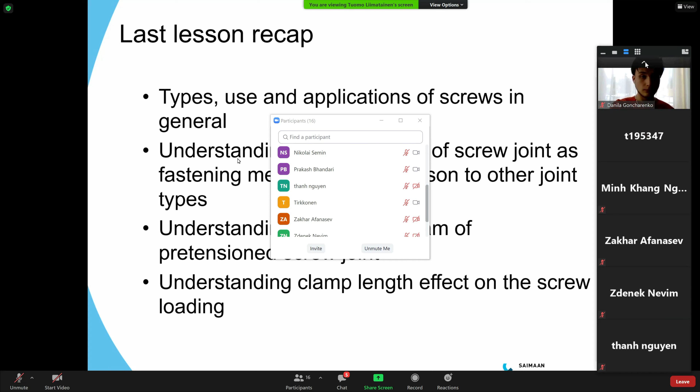So last time we had a presentation about screw joints and their applications, screws in general. We spoke about fastening components, understanding the pros and cons of a screw joint as a fastening method compared to other joint types. We had a discussion about the balance diagram of the pretensioned screw joint, and we discussed how important the clamp length is on the screw loading and in the reliability of a screw joint that is under tensile load.

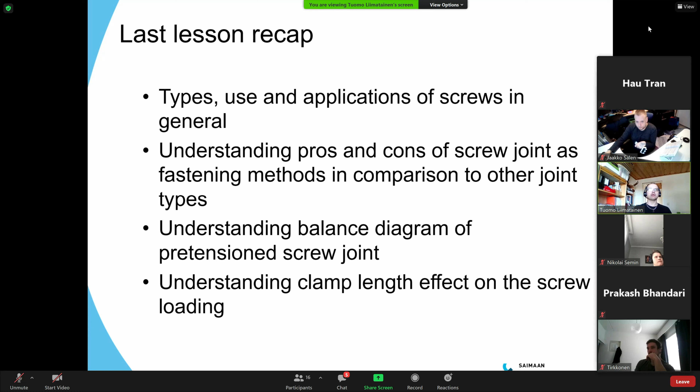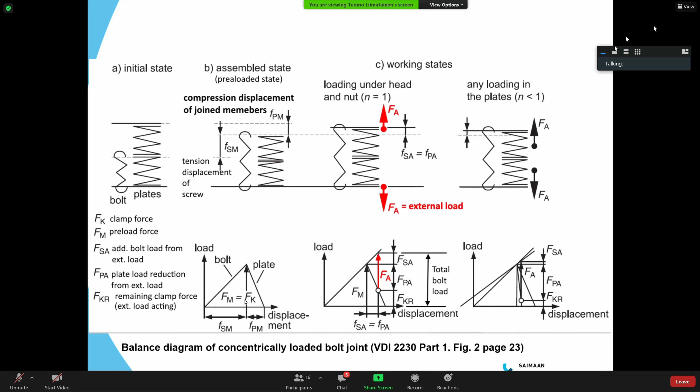That causes us to have this kind of balance diagram where we have the pretension. The bolt and the plate have the same load in it, and the displacement, meaning the tension or stretch in the bolt and compression in the plates, are different, and that depends on the stiffness of the bolt and the plate.

But then when we introduce an external tensile load to the structure, we find these working states. In there we have loading, which can be described as working from the preloading point onto the bolt and also to the plate. As we learned, if we have a suitably designed bolt joint so that the bolt has lesser stiffness than the plate, it means the external force is not loading the bolt additionally as much as it's reducing the compression from the joint plate members.

So this portion FSA is the addition to the bolt load from the external force, and this FPA is the portion of FA that is sort of consumed by the decompression of the plates. Okay, so this is basically the same thing as described last time.

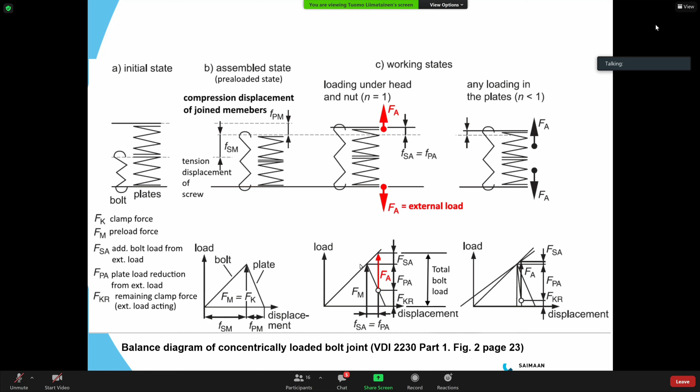Okay, so for today we are going to use the VDI 2230 approach in a certain calculation. It's quite extensive, and we are now only using a certain part of it. We are calculating what would be the needed tightening torque if we have to have a certain preload in the screw. So what would be the tightening torque that we have to apply to obtain a certain preload, and also vice versa, what would be the achieved preload if we have a certain given tightening torque.

These calculation examples should give you the understanding of the effect of friction on preload and on the tightening torque. One hint for everyone is that there will be a calculation according to VDI in the exam, some sort of it. Maybe not exactly in the form as we do it today, but following the same equations and principles, there will be a calculation of a VDI 2230 bolt joint. So pay attention to it.

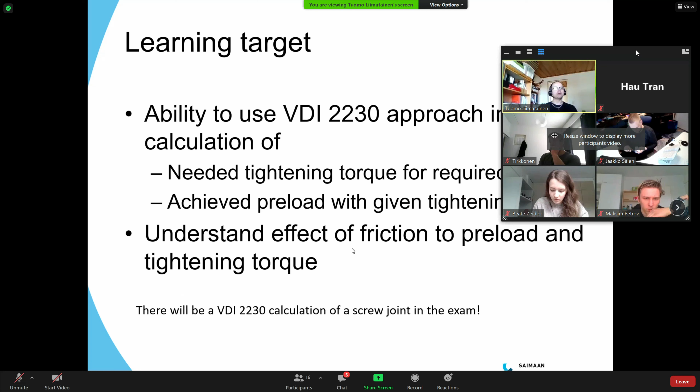Now let's do so that the information is given here in the lecture material. Let's go right away to the task. The first task is to calculate a VDI 2230 achieved preload force for an M12 8.8 joint.

First you need to calculate what kind of preload force you can obtain when your so-called utilization factor nu is 0.9. You will later on see that you will need this character somewhere. After that, you can calculate what would be the respective tightening torque that you had to apply in order to achieve this preload force.

Some information about the joint: the joint members, meaning the plates, also the screw and the nut, are electrically galvanized, which is quite common - basically just a zinc coating on the components. And there is a sort of lubricant.

In this case, it works as a lubricant. It's a thread-locking glue, Loctite 243, on the thread. So of course, when it's cured, then it's locking it. But while we are tightening, it works as a lubricant, and that is something you need to take into account when calculating the torque.

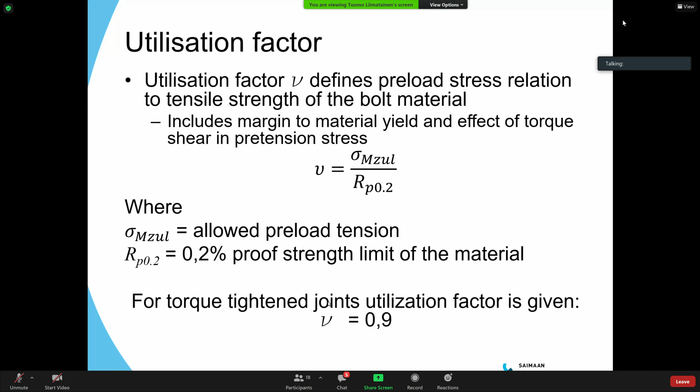It was also given here that nu is now 0.9. The maximum allowed preload stress you can calculate with this equation - there is the utilization factor and there is the yield strength.

And the yield strength for this bolt material, you already know how to calculate - we learned it last time. So you know the method of obtaining the 8.8 grade yield strength. It's basically given in this designation.

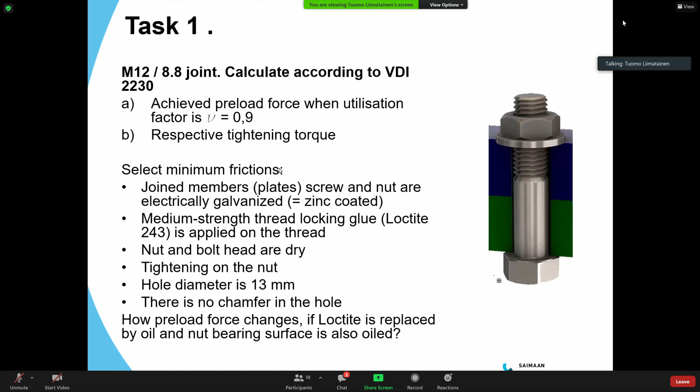And then the rest of the values you need - diameters, P is the pitch, and frictions - you will need to find from the following tables. There are thread dimensions, friction coefficients for different kinds of pairs of materials with different lubricants applied.

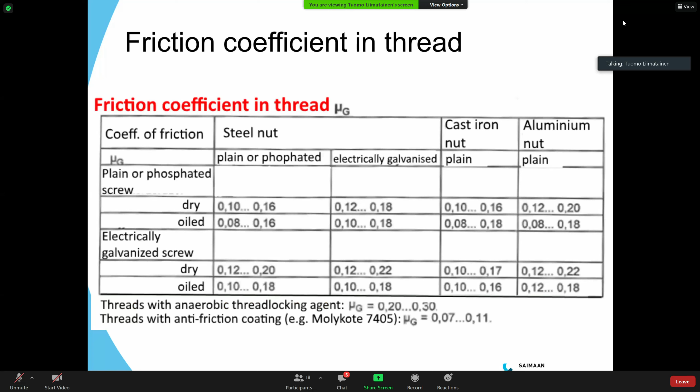One addition to the diameters: these tables are primarily taken from ISO dimensions, and in a couple of places there is a deviation in the designations compared to VDI, and that is being stated where it is so.

So in these tables for ISO nut dimensions, we have this lowercase d subscript a. That stands for the internal diameter of this nut's bearing surface - sorry, not the hole, but the internal diameter of the nut bearing surface. So basically just outside the thread, the bearing area diameter in the nut.

And that is used in VDI written as capital D subscript A. But that is the same thing. So in the equation, there's a capital D A, but in the table you will check this lowercase d subscript A - just to take that into account.

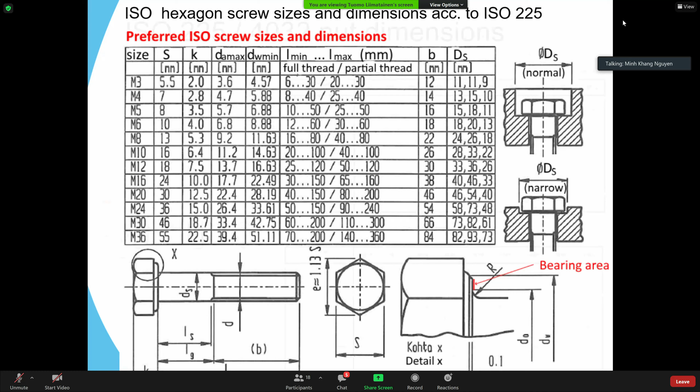Can you repeat again? What is the difference between da and capital D? There's a reason, I don't know what it is, but the standards use different designations for this dimension. In ISO, there is a lowercase d. In VDI, there's a capital D.

And what is the reason? I don't know. There's also a D above the DW capital on the drawing, and there's a capital D there too. And how does it differ from DA?

That's a good question. That means the nominal diameter. So capital D alone means the thread size, the nominal diameter of the bolt - basically the outside diameter of the screw thread, D. So it should be M something. Yes, exactly, so for M10, the D is 10 millimeters, capital D is 10 millimeters.

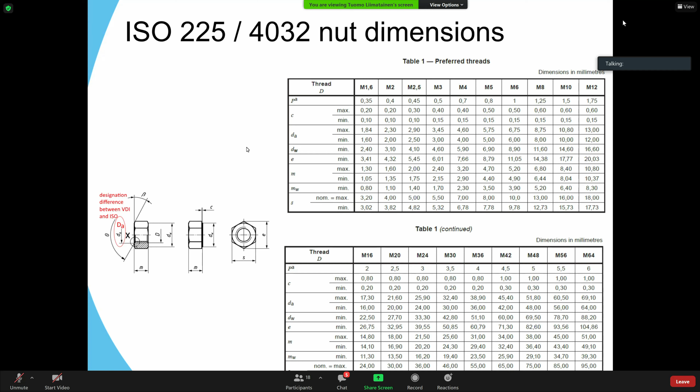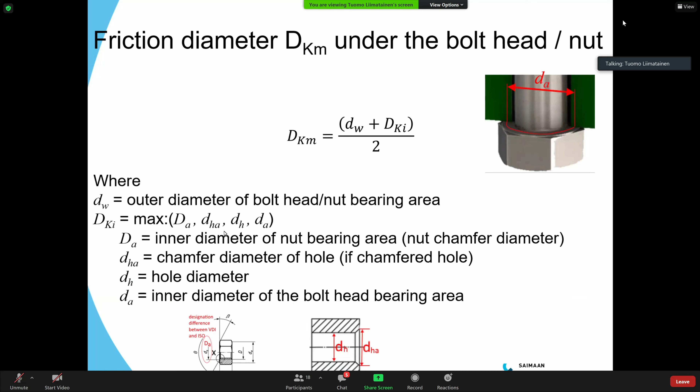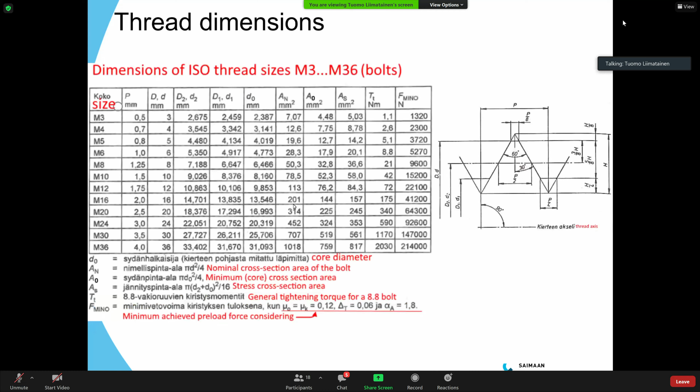Okay, go ahead and start the calculation, and please ask right away if you encounter any troubles. Basically, you should be able to find all the needed parameters for this equation, and also for this equation, from the tables.

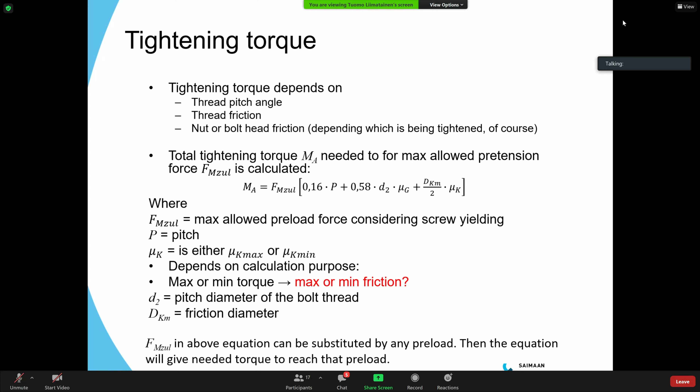So the first step for you would be to calculate the allowed stress, sigma m zul, applying the given utilization factor of 0.9, with the yield strength or proof strength of the bolt material, which you can calculate knowing the strength grade is 8.8. Then you'll find from the tables the diameters D2, D0, pitch P, and the minimum friction coefficient in this thread.